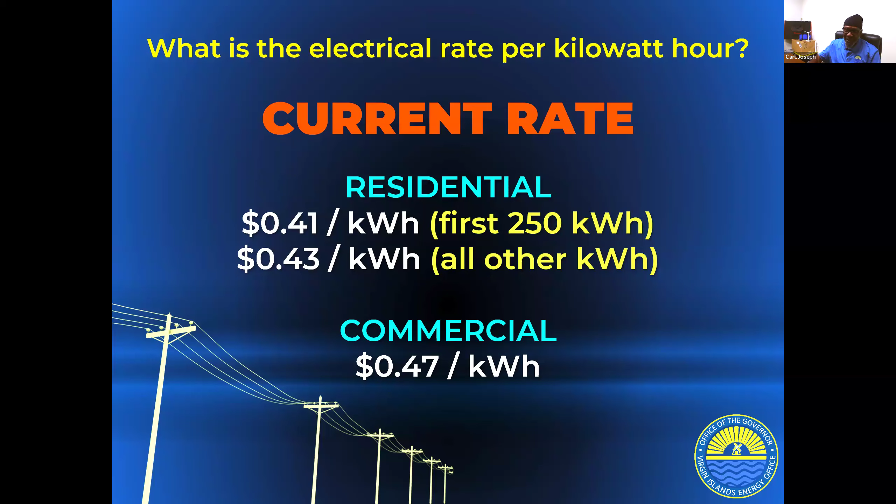Now, you want to be efficient. That's the most important thing in this whole energy business. Efficiency is one of the most important things you can do yourself as a business owner, a homeowner. You can take this in your hands and look at the low cost measures and change, but you're going to have to change your lifestyle, the way you do things. So let's look at these low cost measures.

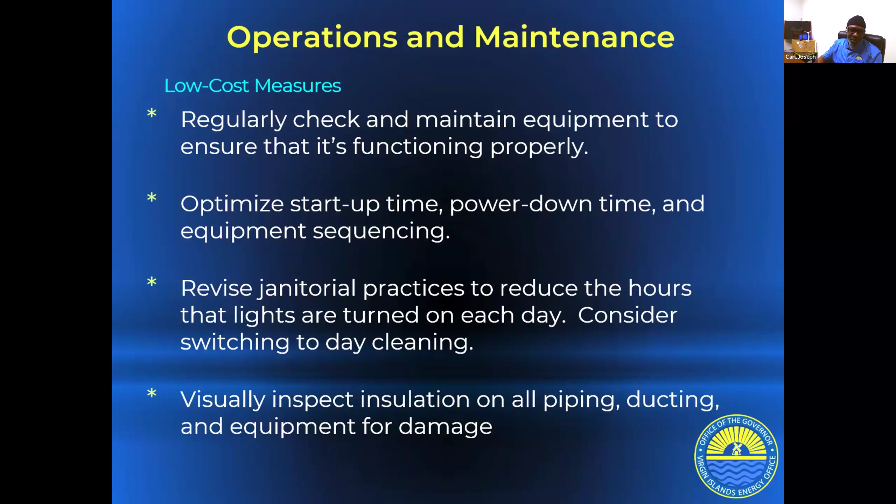Now, everyone, this is a fluid and dynamic situation when you're talking about energy efficiency and reducing your energy consumption. You have to be engaged, okay. These four items listed here are just four low cost measures, right? We can move further. These are other measures right here.

Repair leaking faucets, right? If you repair a leaking faucet, you're saving water, and you're also saving energy, because, for example, if you have a cistern and you need to pump that water, you're using energy to pump that water. If you're getting water from WAPA, they're pumping that water to you, so you're saving on both areas by repairing leaky faucets and stuff like that, okay.

Install WaterSense. Now, WaterSense products, we're going to talk about this as we move forward. Any water product or appliance, you should be looking at two things to help you acquire these products. These labels are WaterSense and also Energy Star. These two labels are going to really help you. So moving forward, we're going to talk about that.

So consider having an energy audit. Before you do anything in your home, you should really do an energy audit to identify the areas where building systems have become inefficient over time, right? I'll give you an example. If I bought a refrigerator in 1920 and I'm still trying to run it right now, it's not going to be as efficient as one that I bought last year, right?

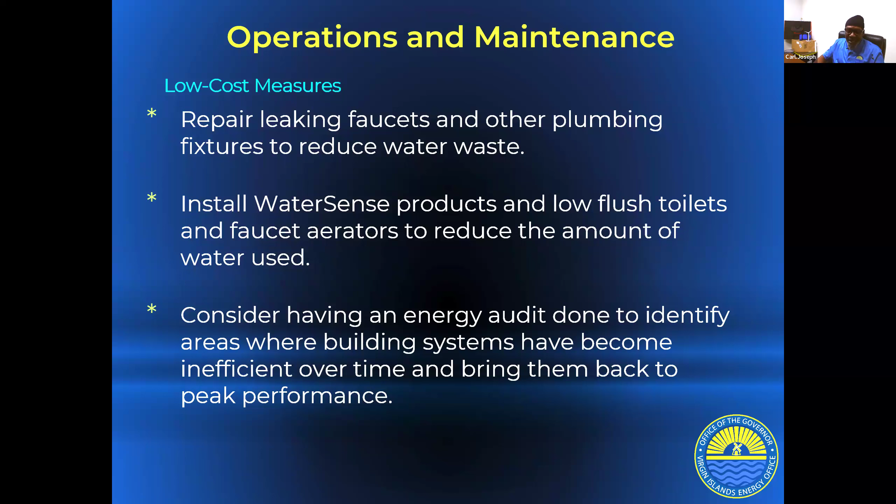So each year, the appliances get more efficient. And that's what we should be looking at, using less energy to achieve our goal. That's what energy efficiency is, the least amount of energy to achieve your goal. So let's move forward. Okay.

So they got with several companies, and they developed the EPA criteria, right? And this criteria is for efficient WaterSense water products. So for example, if you buy a product and you see this WaterSense label, that is the most efficient water product out there that you can buy.

Okay, let's move forward. Now, lighting. This is another one. I'm going down the different areas where you can really use low cost measures to maximize your energy efficiency. Okay.

Daylighting: opening up or closing blinds. That means in your home, for example, if you are able to use natural daylight during the daytime hours, you don't have to put on your light. Turn off lights, for example, when you're not in the room. That's saving energy. During the day, you don't have to turn on the light because you have your natural daylight. So that is self-explanatory, right?

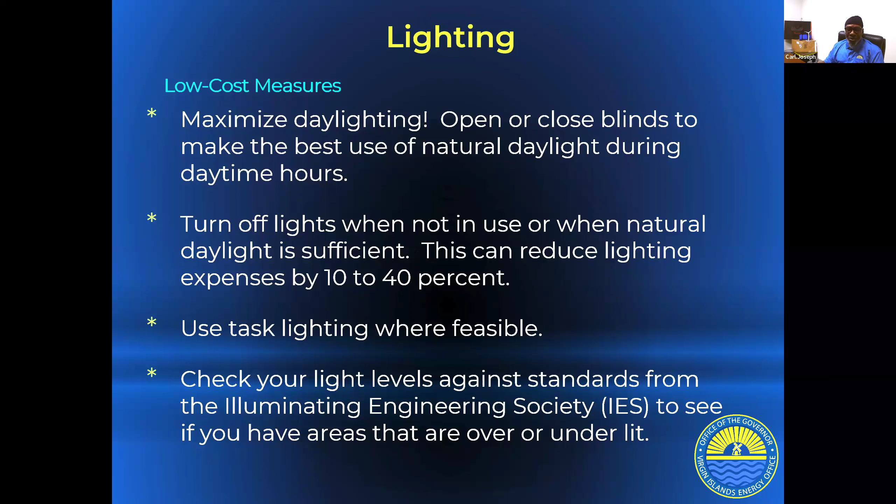Now, let's move forward. Rapid payback measures, for example. We talked about lighting. How does that help you as an individual at home? You're going to replace the old fluorescent and incandescent lighting you have with Energy Star lighting, for example, LEDs. LEDs, we know, are light emitting diodes. I'll give you an example.

Before, light brightness was measured in wattage. Now we don't do that. We measure it in lumens. So for example, before, when I needed a 60-watt light bulb, a light bulb that gives me the illumination of 840 lumens, which is equivalent to 60 watts of energy, that's how it was calculated back then.

Now we have 840 lumens, which is equivalent to 60 watts, but we only need around 9 watts maximum to produce that 840 lumens. So on that one light bulb with 60 watts, 840 lumens, that only needs 9 watts to get that brightness, we're saving approximately 51 watts. That's a great savings right there. So that's how LED works, and that's how lumens are calculated. We now have more brightness with less energy.

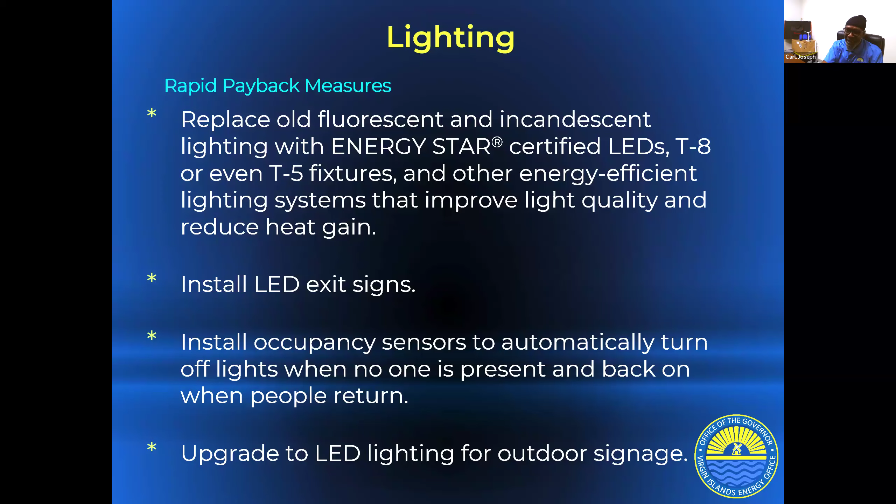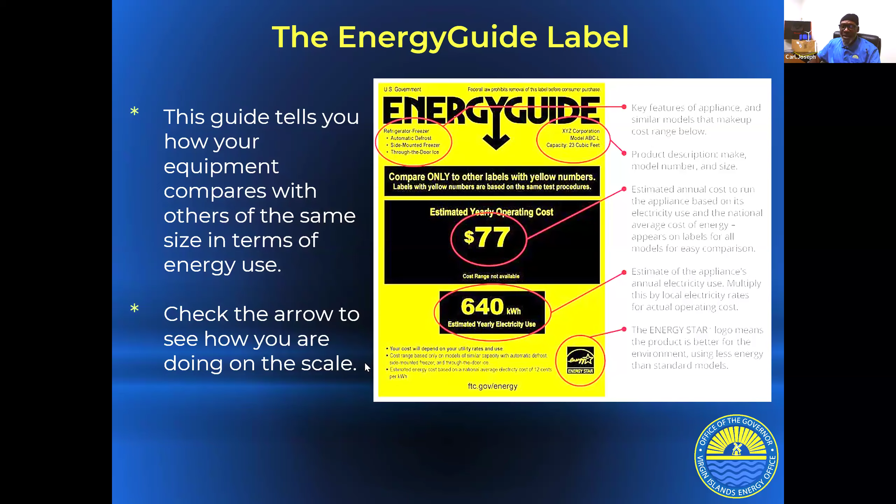Go back. This guide tells you how your equipment compares with others of the same size in terms of energy use. So guess what? You can also make comparisons, right? And you're going to make the comparison based on the capacity. The description, make, and model are telling you, and here it's saying you can compare it with other makes and models of the same size, but different make. Okay, let's move forward.

Now, plug load, low cost measures. We're still on low cost measures for your office, office equipment, anything low cost. We said earlier, purchase Energy Star certified office equipment and electronics and establish a procurement policy for energy saving products. Okay, that's what we just did. By looking at Energy Star products and WaterSense products, we're actually procuring and establishing our own little policy.

Okay, enable the power management function on office computers. So you're buying Energy Star equipment, you're buying appliances, and you're reading the management function of these appliances. It is so important. For example, we buy an AC and it says, just put it in the normal operating mode or best practices mode. We don't do that, right? We want to turn it all the way up, or it's too warm, it needs a little bit more air. And if we put it in the recommended position, it'll work more efficiently, right?

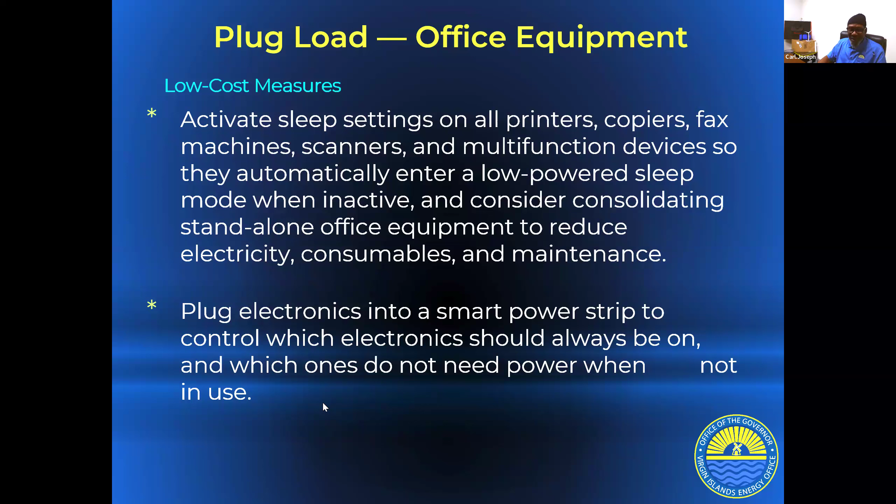Okay. Plug electronics into smart power strips. Oh, great stuff. Someone asked also about the breaker, right? You can also use a power strip. A power strip with a timer is a good device, right? You can program it and it goes off and on according to how you would like. Okay, so that's another area in which you can save energy. Okay, low cost measures in cooling.

And I would recommend that you keep all building temperature settings at around 75. 75 to 78 degrees is what's recommended. I know a lot of us would love to be in Alaska during the summertime in the Caribbean, but it's not efficient. Okay. And again, we're going to be seeing this word a lot.

Maintenance, perform monthly maintenance. That's one thing. If we're looking for longevity with our appliances, our devices, we're going to have to do maintenance. Preventive maintenance checks and services are always recommended because, first of all, you're going to catch any deficiency that is trying to creep up on you. You're going to see it right away. You're going to identify it, and then you're going to use corrective measures, of course, to change that. But perform monthly maintenance of cooling equipment to guarantee efficient operation throughout the year.

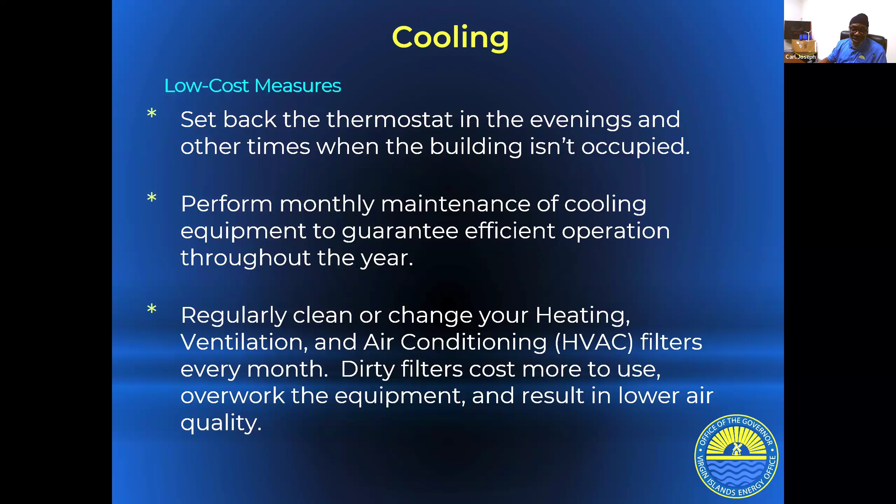And we all know what we have to do: regularly clean or change your heating, ventilation, air condition filters every month. Have a maintenance plan. Develop a maintenance plan. If you do that, you cannot imagine how long your equipment will work and how much money you will save by doing that. Okay. Let's go low cost measures. We're still on low cost measures, everyone.

Block direct heat gain from sun shining through glass. Of course, we have low E windows. They're not as cheap, let's say, they're on the high side when it comes to the pricing. But what I can tell you is you're going to get your return very quickly, because imagine this: having a low E window, your UV rays are not actually coming through, they're being repelled.

So that means if you have your AC on in your home, that low E window is going to repel the UVs. The room is not going to get as heated as it normally would. And that means your AC is going to work less, right? That's what this is about, blocking heat gain from sun shining through glass. And so a low E window is the ideal product to solve that situation. Now, these are just some of the ideas or advice you can take from us here.

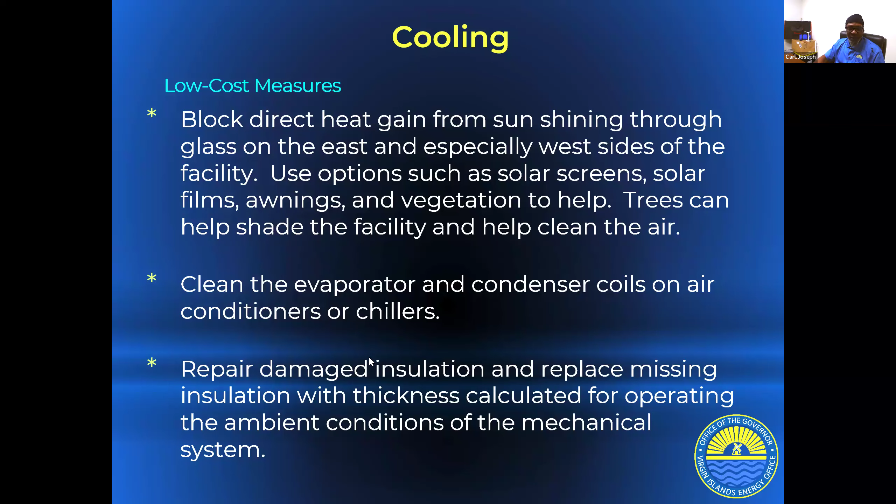Next. So, Mr. Joseph, we did have a question around this. Someone asked, what about temperature settings around standalone electronic equipment for longevity and insulation for networking server areas? This individual understands exactly what we're talking about, because these are energy saving measures.

Not only do they help you save energy, but they also extend the longevity of your equipment. And if we can do that, we're saving money, right? If we're using less energy, if we're maintaining the equipment, we're saving money. The money that we're using to maintain is less than if we have to buy and install a new piece of equipment, right?

So you want to extend the longevity of your equipment and the efficiency as much as possible. And I hope I've answered that. So by taking up these low cost measures, you're helping yourself and your business, right?

So here's one of them that you mentioned, the caulking, even just now. Plug air leaks with weather stripping and caulking. Keep exterior doors closed while running your HVAC system. It will help avoid wasteful loss of cooled air. Okay. Set up an annual maintenance contract for your HVAC system to ensure that your contractor provides tune-ups and reduce chances of system breakdown.

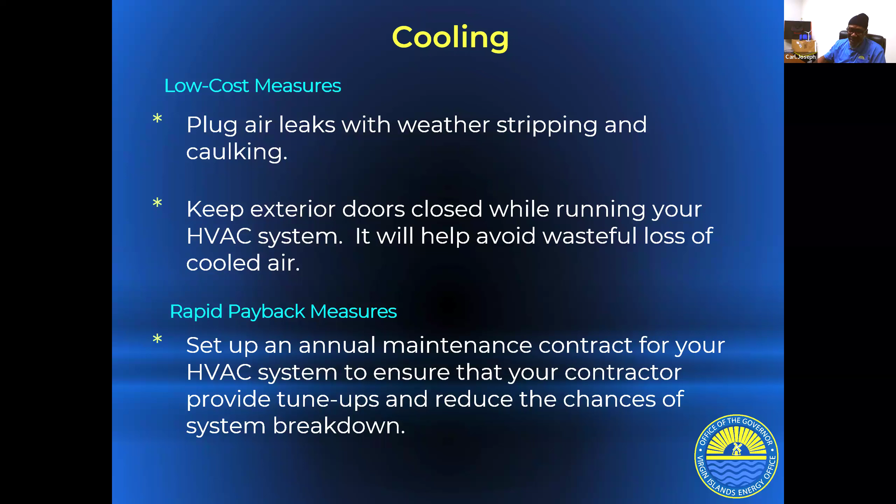Now, you have a car, and if that's your only means of transportation, you want to do the same thing you're doing with your energy consumption, your energy appliances, your water appliances. It doesn't matter. Okay. Let's move forward.

So it's very efficient. We have these things we call variable frequency drives or variable frequency motors, right? They don't take on the load right away. They take their time and build up the power to carry the load. For example, instant water heaters. Once you put in an instant water heater, it has a 40 amp breaker. When you turn on the water, it gets hot right away, right?

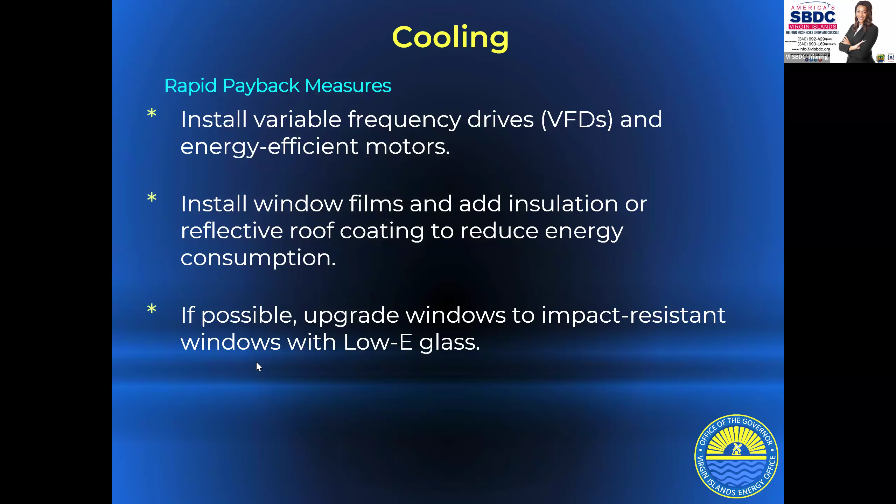We have a question: when will the rebates for hot water heaters be reinstituted in the VI? Oh, they are there already. We do have our rebate program, which will be starting up again. I have things coming later which will inform you of what you can do to get, for example, a solar water heater. That program has been running for a long time, where you get 40% off of a complete system installed.

I repeat, you can go to our recommended vendor. We're going to have a vendors list, and you can locate a vendor in your area, get a quote, have it installed, and get a 40% rebate from the Virgin Islands Energy Office, which is linked to our rebate program. That is possible. I'm going to give you more information later on this one.

But as I mentioned earlier, if possible, upgrade your windows to impact resistant windows with low E glass. This is great. All this has to do with cooling. And by upgrading your windows with low E windows, again, just like we talked about the coating on your roof.

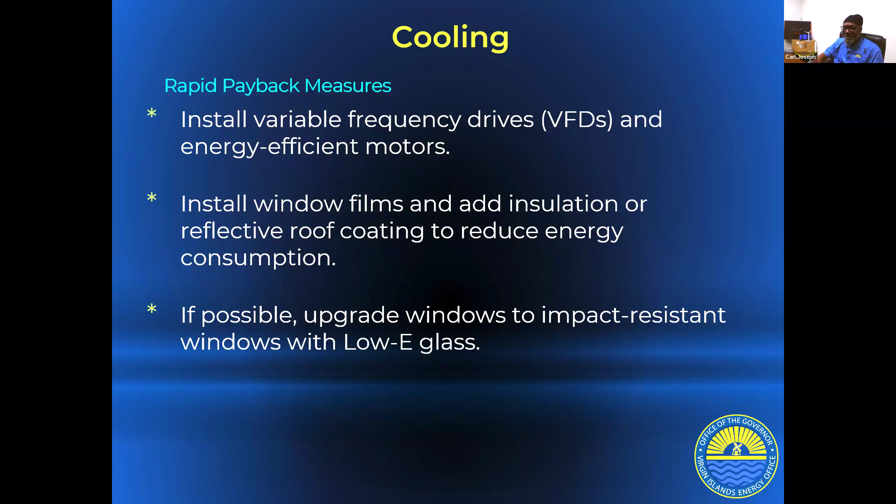And here it says how low-E window glass works, right? It helps reduce the transfer of heat through the window, typically used on multi-pane windows with argon gas fill, you know. So in our climate, the low-E coating is applied to the outer layer, east and west facing windows.

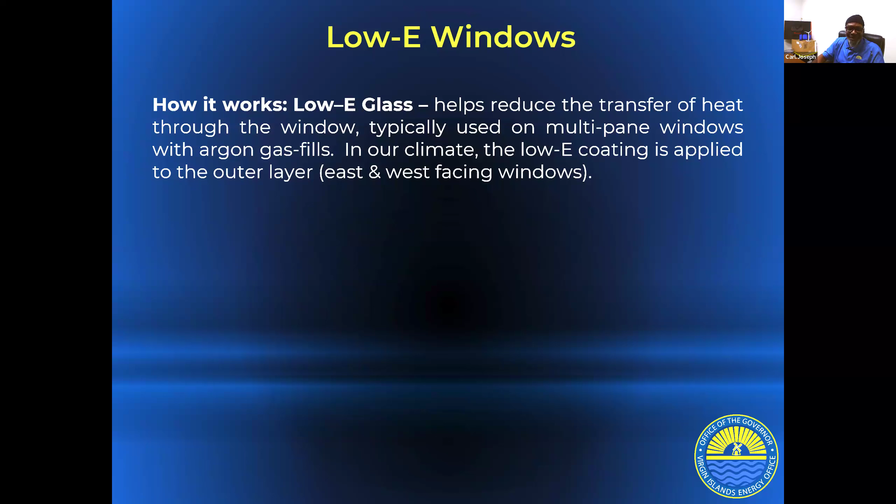So everyone, I would do this. I would definitely do this to reduce heat gain in my home, and that is going to help my AC work more efficiently. Okay, so I'm working on my windows, I'm working on my roof, right, to get that relief in heat gain so that I can save on my AC. Makes sense.

This is how it looks. For example, see the UV light is being reflected out, the summer heat reflected out. We don't have any winter, but it will be the same thing. The heat is coming back inside. That's what it is.

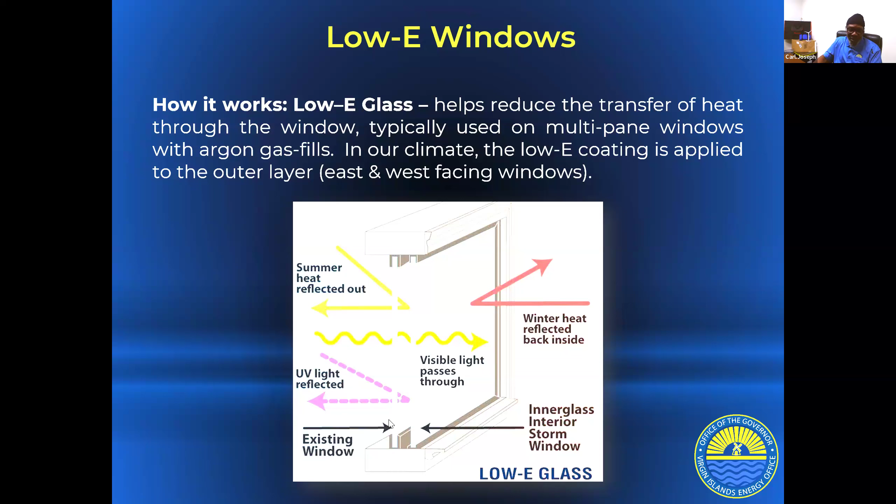Now, storm windows, isn't this a good thing for us? Right? We know it's a double pane, right? So at least in storms, if the first one is broken, we still have the second one. Hopefully it doesn't happen, but those are the advantages of having such a window. Okay, let's move forward.

Our behavior and education. Now, we're the occupants, right? How is our behavior going to affect what we're doing? And how are we going to educate others to continue to do the same thing we're trying to do now? Now we're going to educate our staff about the basic principles of energy, right?

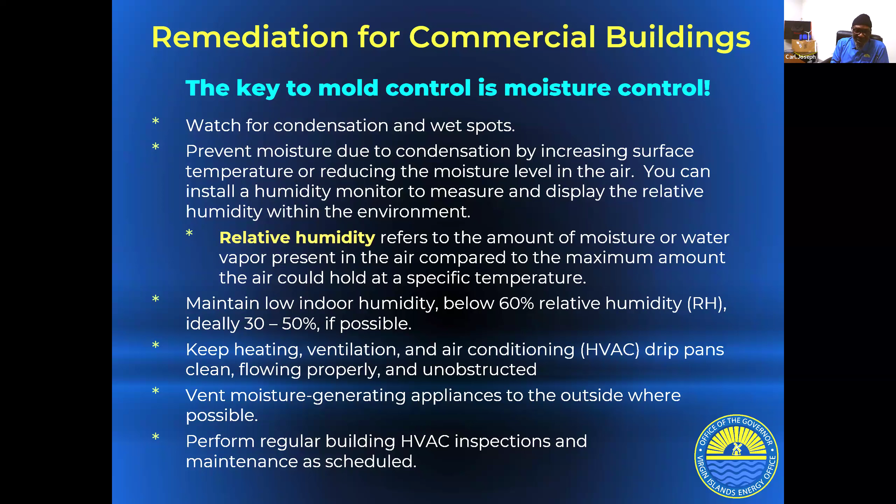But for a business, you have customers coming in and out, so you're going to make sure that you have a company that's doing this work. And vet that company, see if they've done work in other places. Don't just call the first one, and make sure you're making wise choices, because you're going to be serving people, and if your business is not doing the right thing inside, it's not going to attract the amount of customers that you expect to attract.

Now, best practices for profiling energy use. For example, Energy Star has a Portfolio Manager tool, which helps measure and track the energy and water use, materials and greenhouse gas emissions of your building. Imagine that you can get a tool to track all of these measures. All you have to do is go to energystar.gov/benchmark to learn more about this Portfolio Manager.

Now, you can also use the results to identify. This is where your preventive maintenance checks and services come in. If you perform services where you improve your efficiency, you verify the efficiency, and not only that, you make investments to improve on previous efficiencies, over time you'll have a management system in place that is definitely going to have superior energy performance.

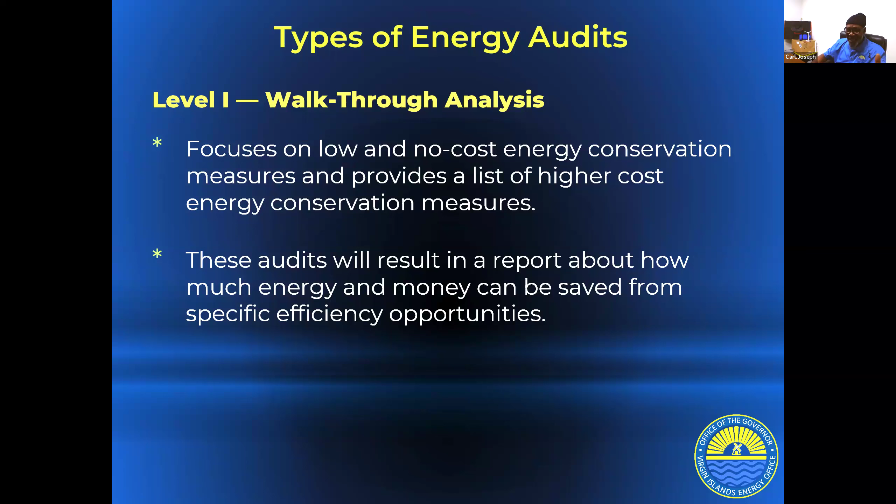It's a high cost. But the next thing you're going to ask yourself, how long and how much do I have to invest before I start seeing savings? That's what this is about. How much do I have to invest? And how long before I see savings? Okay, this is what this level is about. Let's look at the next level.

Level 2, energy survey and analysis standards. This includes more detailed energy calculations and financial analysis of proposed energy efficient measures. Now, we have identified, that's what it's saying, you have a detail now. You had an auditor come in, he identified the deficiencies, and we're ready now to do our calculations, financial analysis of the savings you're about to get.

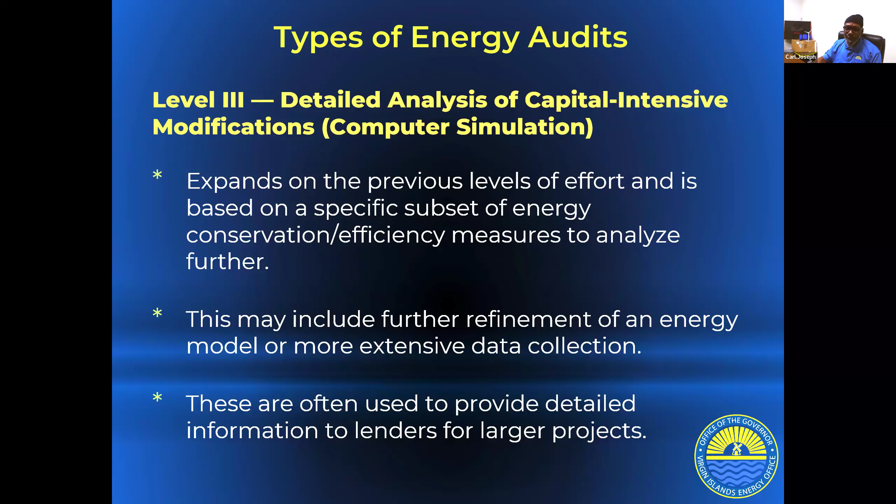Let's go first back to finding an auditor. To find an auditor, you can check your utility company. They usually offer a free or inexpensive service, right? Or have an energy conservation department. That is a possibility. You could check with WAPA on that. The private sector companies include consultants, energy service companies, ESCO. That's another way. We use ESCO here at the energy office.

I don't know if people remember that the energy office was also using a company to go into the schools to do audits to reduce their energy consumption. That was an ESCO company. Okay, that's what these companies are called, energy service companies. Okay, and again, check your Energy Star products and energy. We can also get the Energy Star Portfolio Manager, right? Your state energy office may offer free inexpensive audits. And like I said, we do offer that, but through the WAP program. So these are ways you can find energy auditors.

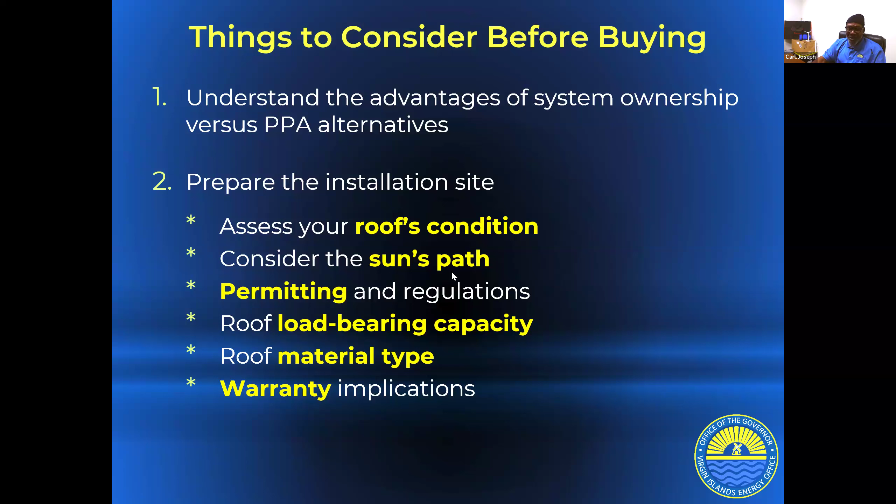Things to consider. Let's continue. Number 3, gain an understanding of your energy consumption. Didn't we say that? We said this is the most important thing. How are you going to reduce your consumption if you don't know what your consumption is? Okay. How do you know you're consuming too much? Until you know your consumption usage, you will not know that, right? So we need to know that. That's number one.

Okay. Now, partner with a reliable installer with a proven track record. If you're thinking of installing this, you need to partner with someone who has a reliable track record. Now, we do have a list of installers that you can find at our website, and if it's not there, one is coming soon. We are creating a list for it. So you can reach out and we will be able to help you on that one. Do your research and remember to set clear goals. Have an idea of what you need.

Prioritize your must-haves. Okay. Now this is big. Must-haves. It's not needs, everyone. It's haves, right? Needs and haves. What must I have? I must have a system. What else is needed? I need batteries also. Okay, I must have a system, but once I get a system, I'm going to need batteries. Okay, you see the difference here? I must have, I want a system. Do I need a system?

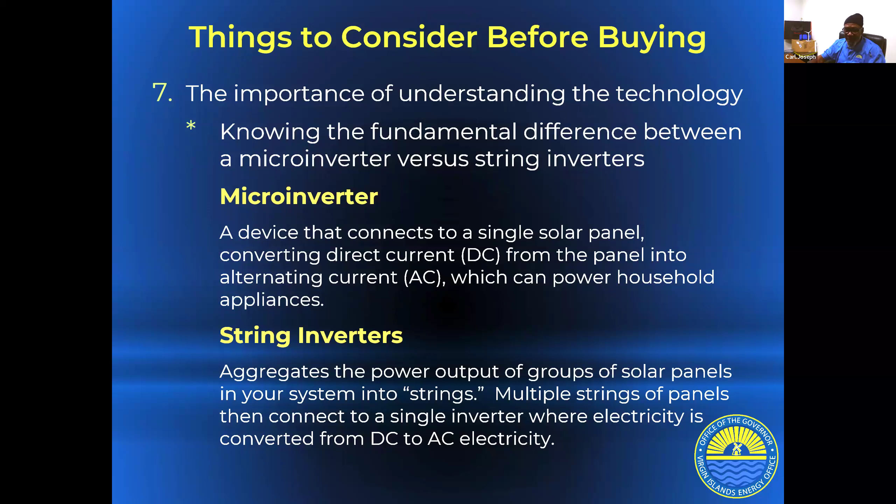Ensure the layout leaves room for adding more panels if needed, right? Maintenance access. Now, if needed, but also you're gonna want to maintain your system. You're gonna want to clean your solar panels, right? You're going to want to check and make sure that everything is secured also. So space, you're going to need space. You're going to need access for that.

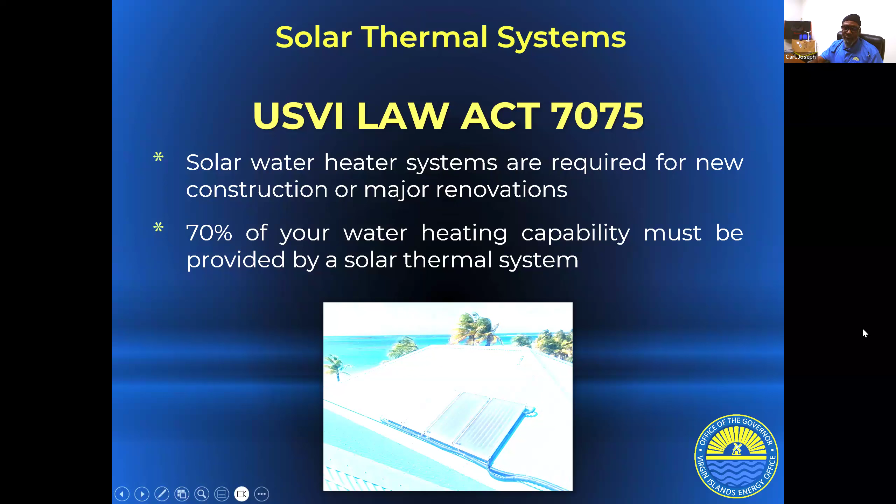Miss Industrious Phyllis. It takes a while before the message goes through. Anyone? Anything next?

Now, solar thermal systems, as you see, there are different types. And by using sunshine to heat or preheat your water, you can cut your water heating bill by, what did I say? 15 to 25%, and it says by half, right? Now, the reason for that is if you're using a conventional water heater, it does have a thermostat inside of it. Most of the time it's set at 120 degrees. And you can also go inside and set it to another number, which is 90 degrees, which is more our ambient temperature in the Caribbean.

So I would go and try to set it at the 90 degree position, because what a thermostat does, once it reaches the required temperature, it stays there. Now, after it cools, the thermostat is going to tell the device, well, it's cool now. It's not 90 degrees anymore. You need to get it up to 90 degrees, which is going to activate some sort of sensor to say, well, you need to heat it up some more. Throw some more heat in here, guys. We need to get it back to 90 degrees.

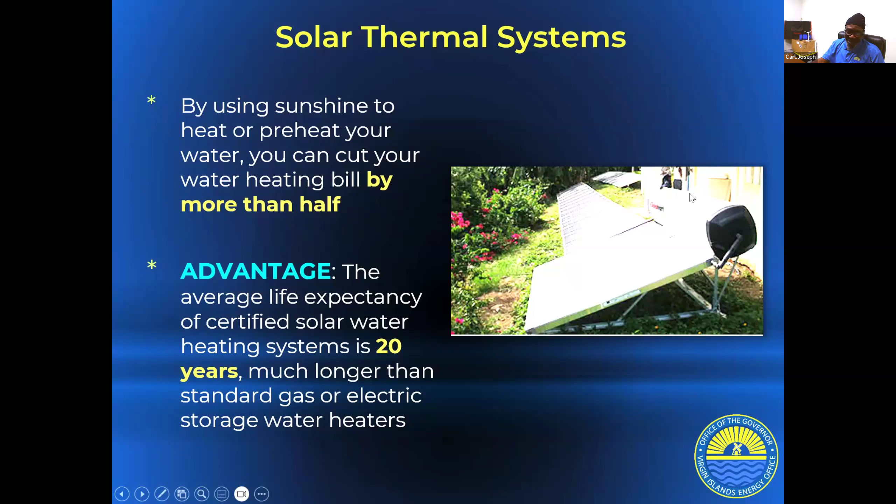You know, the average life expectancy of a certified solar water heating system is 20 years. That means the collector, this part right here, most of the time lasts a long, long time. You sometimes have to change the tanks, okay? Now, the two types of solar thermal system, before I go any further and talk about the tanks: you have your thermosiphon, as you see, the collectors. These are the two collectors right here. This is your tank, okay? This is roof mounted also, right?

And this system has a tank mounted above the collector, as we see here. As the collector heats the water, it rises to the storage tank. So it heats right here, and then it goes in here, okay? That's how it works. Now, the heavier cold water sinks down to the collector, right? That's all it is. Heats, goes back up in here. This gets cool, this sends it back up again. It's just rotating. This one is different.

We have the tank. It's a direct loop. The tank is down in your basement. This is on your roof. And you have a solar pump up on your roof with a solar panel that circulates the water. So when it gets cool down here, it replaces it. It's just a loop going around. And an electronic controller or a photovoltaic panel regulates the pump. You see a little photovoltaic panel right here, right? That powers a circulating pump that sits up here, that pulls the water in the tank and replaces it as it gets cold. That's how that works.

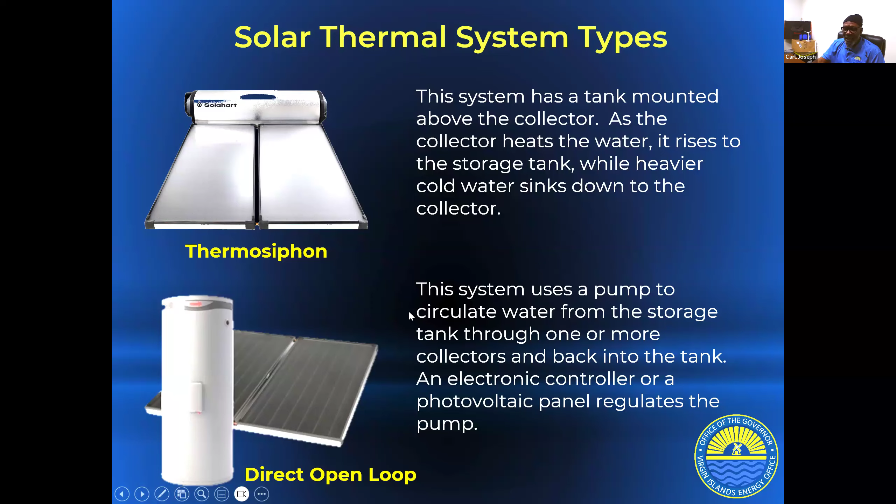So I cannot express this anymore. Safety is really one of the most important. Safety first, everyone. When you're dealing with electricity, anything that says electricity, electrical, safety first. By just sweating and touching a wire that's exposed, you know, it can kill you. It's a deadly experience. So please do your best and exercise safety all the time, okay?

As a responsible building owner or occupant, taking proactive measures to prioritize electrical safety is vital. So no more on that, let's continue. Safety tips for commercial buildings: maintain your appliances. We see this word a lot. Maintain, maintenance. This is large when it comes to energy efficiency and renewable energy. Maintenance of your appliances is so important.

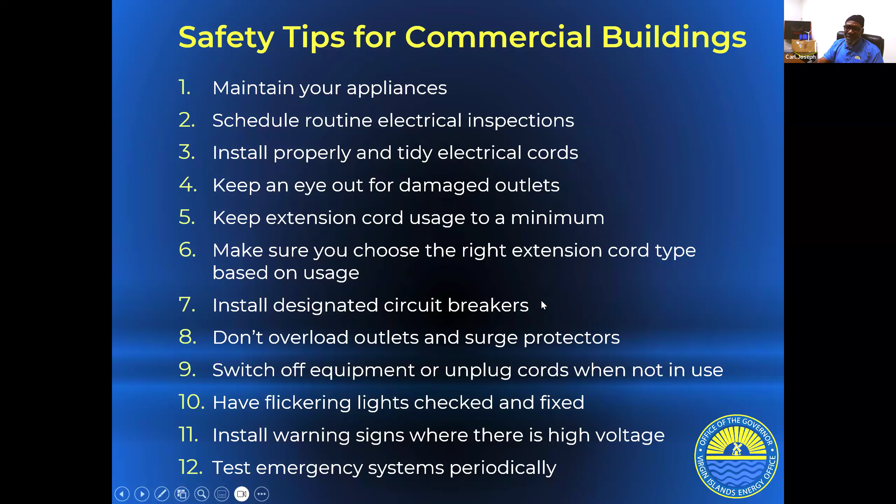So are there any questions before we get into this? I would like to take any questions before, because I'm going to go straight through it. Miss Industrious Phillips, anything, please? No questions. We can proceed. Okay. Now, everyone, we really know the energy emergency plan. We have been going through it here a lot lately, and so we know what it is. So let's go into it.

The Ready Business Program, with the aid of these toolkits, assists you by building and developing emergency plans for your business. So here are some tools that we have just put together for you. This is information that, if you look into it, will help assist you in creating your own emergency energy plan. And the step-by-step guides will show you how to. But first of all, we're going to go through some pointers here.